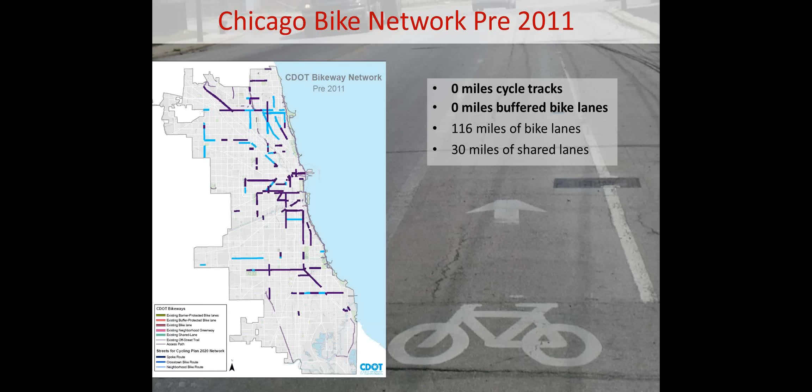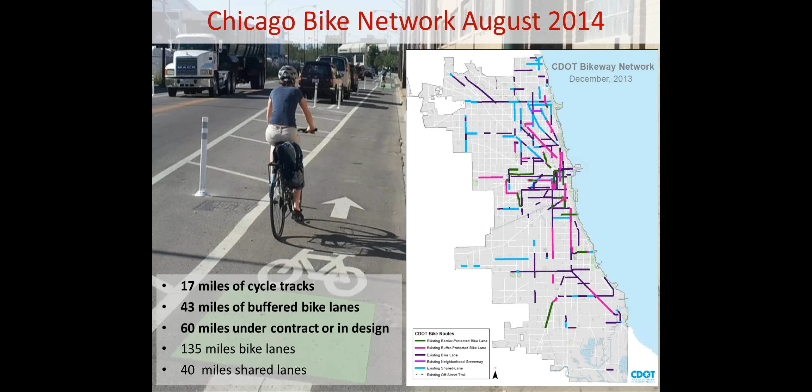So a little bit of background on the city of Chicago. Prior to 2011, we actually did not have a single mile of cycle track or buffered bike lane in the city. We had a pretty good network of bike lanes and shared lanes, but nothing providing that separation. As of this month, the network has really grown. We're up to 60 miles installed of cycle tracks or buffered bike lanes, and we actually have another 60 miles currently in design to be installed either later this year or early next year. So we're working through a lot of different projects.

From a technical perspective, this presentation draws from a few different manuals. The NACTO Urban Bikeway Design Guide is a great design guide - I recommend you take a look at it, it's free online. We'll also be drawing from the AASHTO materials, both the bike design guide and the green book, the geometric design. Our designs have actually been vetted locally in Chicago through those manuals, because those are critical for a lot of roadway designers, and also the Manual on Uniform Traffic Control Devices for all of our markings and signage.

First off, I want to walk through generally what I think is most important when designing intersections for bicyclists, and I think it's really bicycle position and conflicting turns. Then I'm going to walk you through 3 different types of designs we've installed in the city of Chicago and what went into those designs.

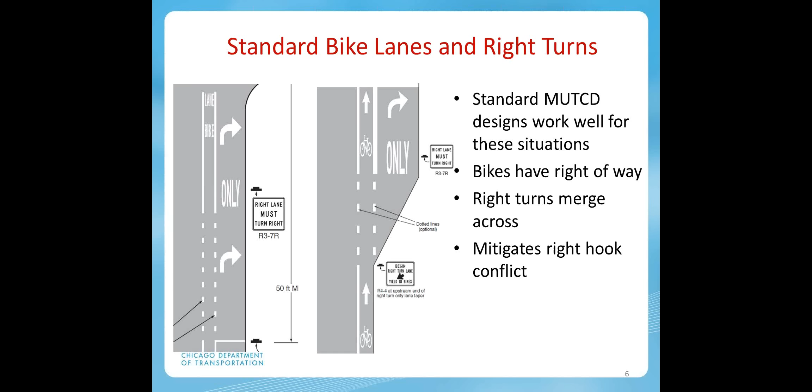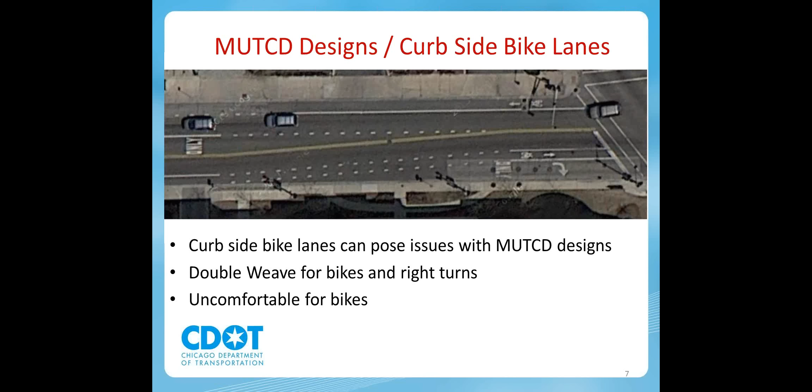Moving that conflict upstream and mitigating it is a good idea. Unfortunately, one of the things we've seen is with curbside bike lanes, which is very typical of protected bike lanes, this can cause issues. Trying to force this MUTCD concept on a curbside bike lane can actually create a situation where you end up with what I call a double weave, where bikes have to weave left and right turns have to weave right. That asks a lot of the users, and it's an uncomfortable situation for bikes - they have to look over their shoulder and merge and also look for right turns. I think all it's doing is moving the conflict up, not really addressing it.

So with that in mind, what I see as the intersection design goals for protected bike lanes: at all intersections we really need to understand our traffic speeds, our volumes, and our visibility. Those are very critical components to all intersections, and they hold true for protected bike lanes as well.

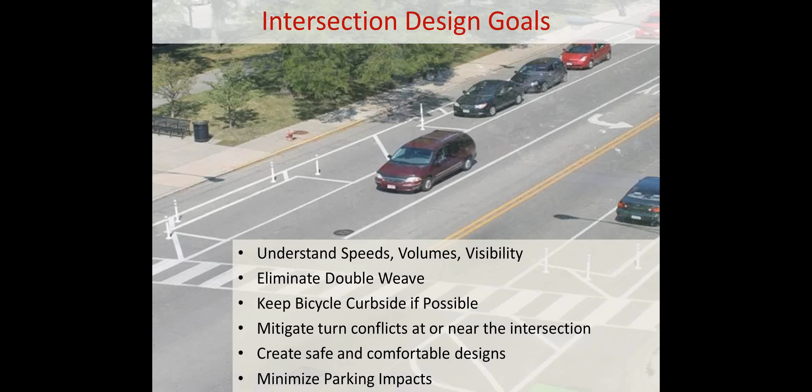I see that double weave concept as something important to think about when designing comfortable protected bicycle intersections. In addition, I think keeping the bike curbside or as close to curbside as possible makes it much more comfortable for a larger population of cyclists. Then, making sure to mitigate those turn conflicts at or near the intersection creates safe and comfortable designs. On-street parking is very common in a lot of cities, and when we do protected bike lanes, we're often shifting that parking out. It's hard to balance the needs for parking demand with bike design, so coming up with designs that minimize parking impacts is a goal as well.

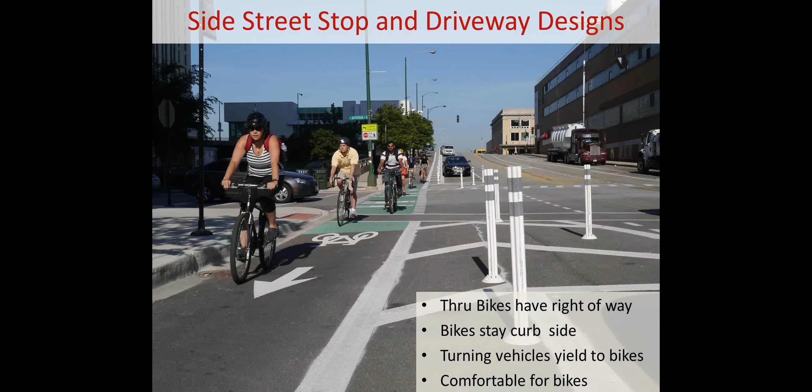The first type of intersection design is something I call the side street stop or driveway treatment. As you can see here, bikes are kept curbside, they have the right-of-way, and there is no traffic control stopping the bike. Turning vehicles are to yield to bikes, and I think this results in a very comfortable facility for bikes.

Looking at some of the geometrics of it, this design is really important when you have on-street parking or something physical in the roadway that would obstruct visibility. So it's important to pull that back a sufficient distance to open up those view angles. If you look at the AASHTO Green Book, there really isn't much guidance for right turn from major, which is the movement that controls for visibility.

So what we've done here is use some criteria on stopping sight distance based on our understanding of how drivers use driveways and intersections. We use 10-mile-per-hour stopping sight distance for driveways, based on the fact that most driveways are designed to accommodate a vehicle turning around 10 miles per hour. And we use 15-mile-per-hour stopping sight distance at intersections, because that does a good job mimicking - in the state of Illinois we have requirements where parking is pulled back 20 feet from the crosswalk.

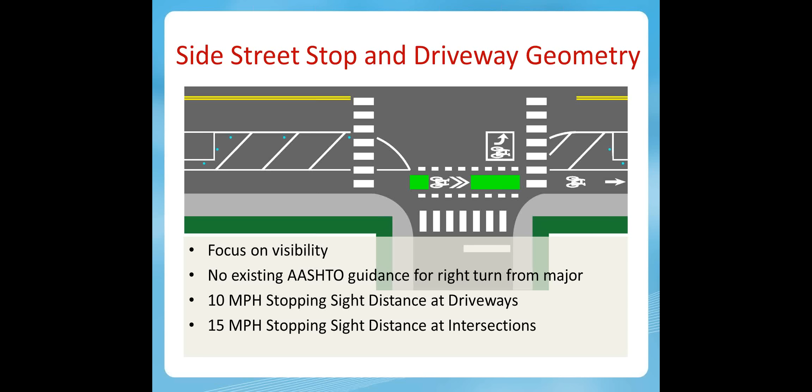That opens up a view angle of about 15-mile-per-hour stopping sight distance, so it mimics that same situation for bikes. You end up pulling the parking back about 30 to 60 feet, depending on that stopping sight distance number you utilize. This example shows an intersection, so the parking is pulled 60 feet back from that face of curb on the intersecting roadway, because really, as we're measuring this, it's where the vehicles turn.

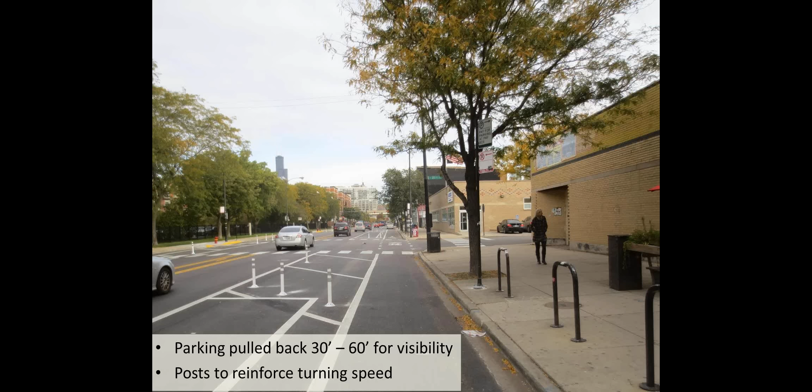As you can see here, we've used these flexible delineators, or posts, to help reinforce those speeds and make sure cars can't cut the corner too quick, really to reinforce that slower turning speed. Ideally in the future, this would be a situation where we could come back in and put some concrete here to really reinforce that turn speed.

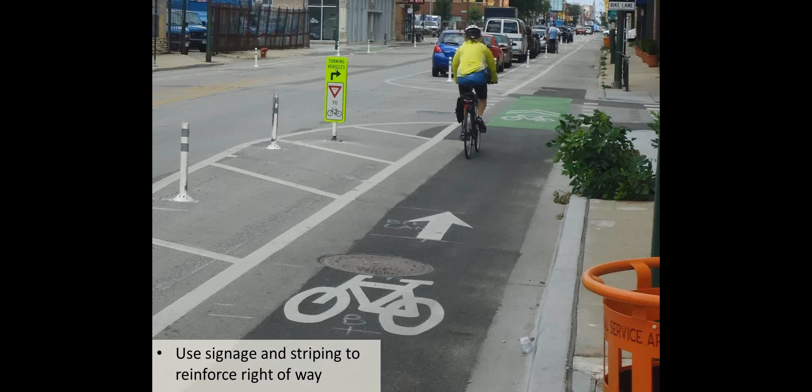In addition to that, you can also use some signage and striping to help reinforce that right-of-way. This is actually a driveway treatment. We've installed a sign helping to reinforce that turning vehicles are to yield to bikes, and also installed some intersection markings, some dashed white lines, and some green pavement markings, really to highlight the fact that that's a location where you'll see the conflict between bikes and turns.

The second type of intersection design I'd like to present is something we call a mixing zone. This is something you'll see now that we're getting to a point where we have signalized intersections or a lot heavier right turn volumes. Also, with the signal, bikes are expected to stop at a red light — they don't always have the right-of-way here. So the concept here is really to create a space that's slow in speed, shared space, encouraging single-file travel.

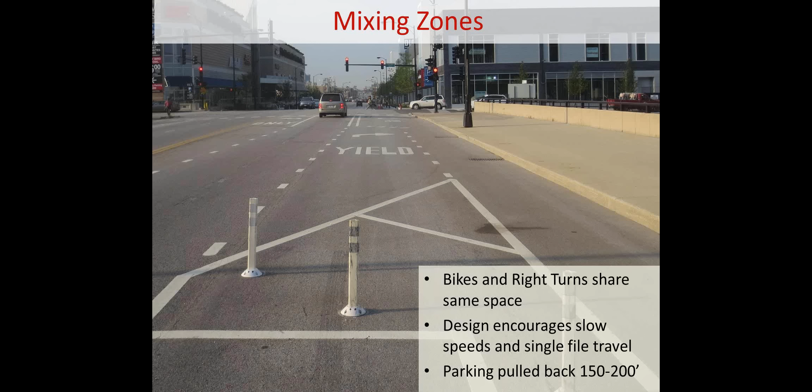You'll notice here the parking is pulled back a little bit further than the last concept I showed. Typically speaking, it results in about 150 to 200 feet of pulling back the parking from the stop bar. Some of the geometry of mixing zones: in the city of Chicago, our design is based on a 30-mile-per-hour vehicle speed. As speeds go up, that's something you really want to pay attention to, and mixing zones work well at slower speed environments. If you get to much higher speeds, mixing zones may be more difficult to implement.

But the AASHTO Green Book does call out that you can accommodate up to a 10-mile-per-hour deceleration in the through lane. So what we're doing is accounting for the fact that the driver, as they enter the right turn mixing zone, will start their deceleration before they hit the turn lane. The geometry is set up for a 1 to 7 taper, based on a 20-mile-per-hour speed. The storage near the stop bar varies depending on capacity analysis. Our minimum is 50 feet, based on 2 vehicles, out of the AASHTO guidance.

And the lane is striped at 14 feet to allow for shared space. So if a right turn and a bike get there at the same time, they have enough space to be side by side. But by the point of the intersection, we encourage more of a single file path to get the bikes where they're not shadowed on the right side of the right turn.

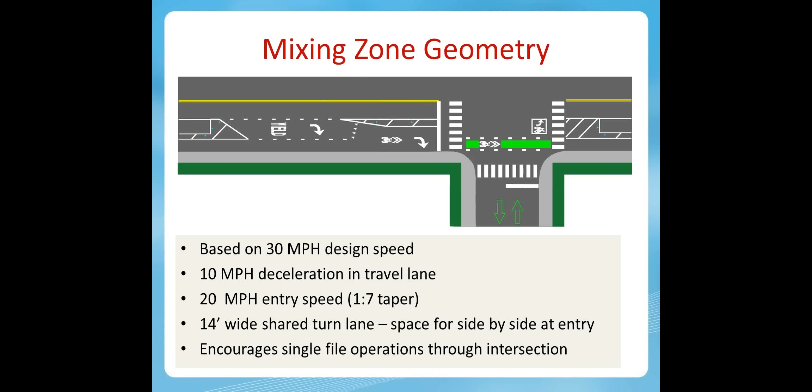So a little bit more on the mixing zones. A couple things we've done is actually installing posts in that striped-out area between the through lane and the right turn lane. Ideally, that would be concrete and more of a permanent situation. You really want to make sure people don't turn right out of the through lane, because that's where a bike would be kind of hidden behind the turn, and that also helps encourage the vehicle to slow as they approach the mixing zone.

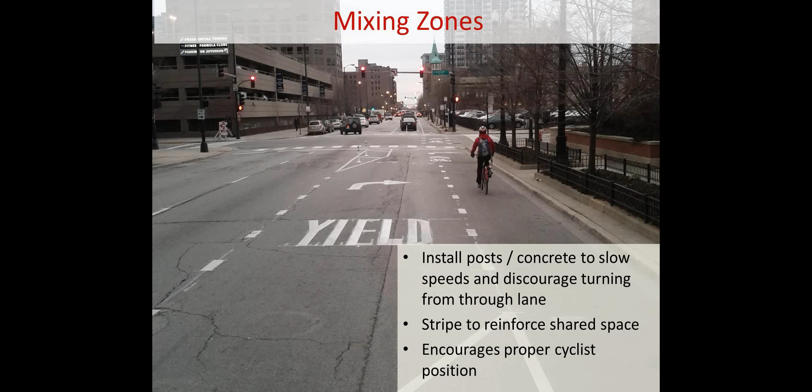As you see the markings, we've gone with a right turn and a yield legend, really reinforcing the fact that it's a shared space. We try to position the shared lane markings and the right turn markings in a single file path to really encourage the bicyclists to come out just a little bit and be single file with the right turns. In the intersection, you can see the intersection markings are kind of kinked a little bit to the left, further reinforcing the fact that we want the cyclists to come a little bit away from the curb and form a single file path.

We have also done mixing zones on streets without parking. It's not quite as critical here because visibility is not an issue.

But really what you're looking at here is with protected bike lanes without parking, what we see is that width does a pretty good job shadowing right turn lanes, because if you have, let's say, a 7-foot bike lane and a 3-foot buffer, that can actually turn into a 10-foot right turn lane at an intersection if you have a location with a high volume of right turns.

Another thing we've done, a nice subtle trick, is if you have enough space, you can position the cyclist a little further left in advance of the right turn lane, helping separate those decision points. So as the cyclist approaches, they shift slightly left, then have a straight path through the right turn lane, and the right turns mix across, separating those weaves.

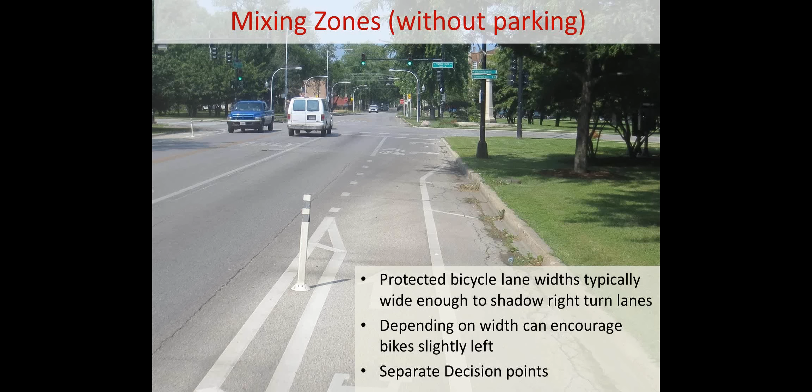If this was mirrored on the right-hand side, you'd have conflicting turns to the right. The general principles still hold true, that you're really trying to manage those conflicting turns.

One thing to note: if you're looking at a two-way cycle track, I highly recommend limiting those to streets that are one-way in nature. Doing a two-way cycle track on a two-way street creates a lot of conflict points at intersections. It can be done, but it gets a lot more complicated with traffic phasing and signalization.

But if you do this right, it can actually result in a really comfortable facility for bikes where they are completely separated from conflicts from turns.

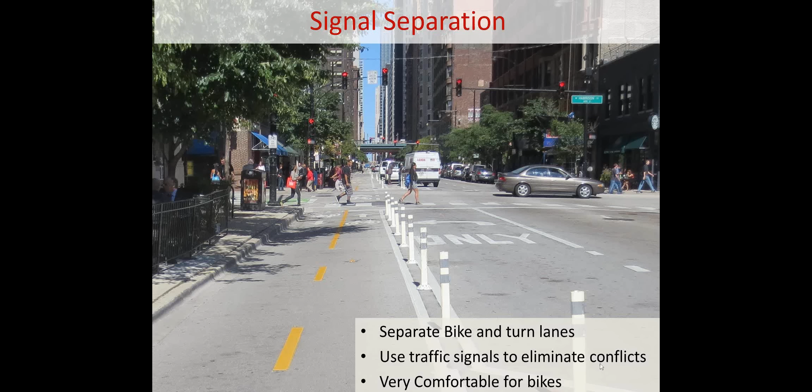One of the critical components of this project was installing dedicated bicycle signals, and Nick's going to touch on this a little later. These are brand new elements you can utilize in your design. They just got interim approval less than a year ago.

This is based on the fact there have been a lot of good studies throughout the United States, in localities including Chicago and other cities, showing that these have really done a good job eliminating conflicts between turns and bikes, allowing for increased safety and also increasing cyclist compliance.

We did some before and after analysis looking at cyclist compliance with bike signals, and we noticed that compliance went up from 30 to 90%, with not much education or enforcement, just with the bicycle signals.

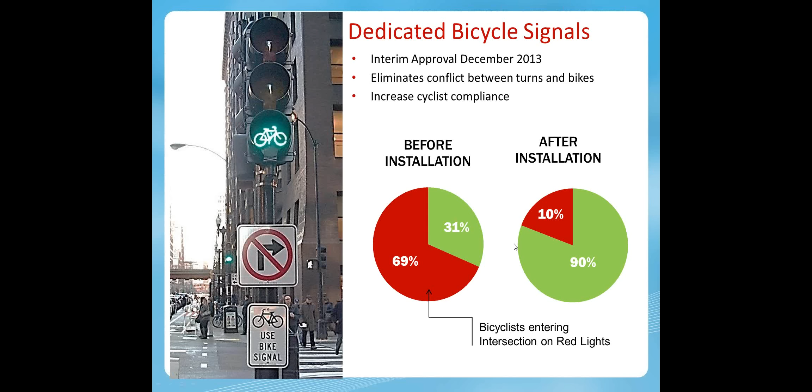Some of the technical elements - this slide is directly out of the NACTO guidance. They do a great job outlining all the critical components for designing bicycle signals and other components.

First and foremost, it's important to have 2 signal faces per movement, and one of those needs to be far side. So if you're installing bike signals, at least one needs to be far side. You can put both far side, but if you don't have the room, one can be near side. I recommend using 12-inch lenses for far side.

There is some guidance in the MUTCD that allows you to go down to 8 inches. I don't recommend it - I think if you have the budget, using a larger lens is really a good idea.

On the near side, you see the signal is a little lower and smaller. That's a trick some places have used, where they use 4-inch lenses, and it is allowed in the MUTCD as an option. I also recommend going to protected-only vehicle turns.

This does a really good job eliminating the conflict between bikes and turns, and it can also help if you have a crash pattern between turns and pedestrians, maybe in a downtown environment with a lot of pedestrians - it can help increase safety with that.

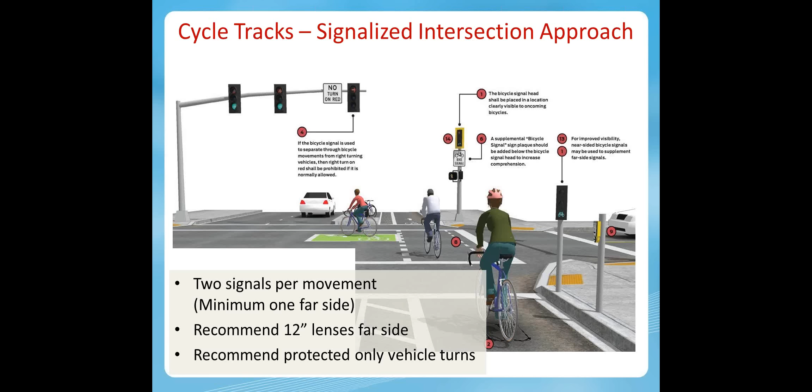What we've seen in the Loop is actually slightly better capacity, because there are so many pedestrians crossing the street that hard turns get held up. So providing that protected phase actually helps a little with capacity.

As mentioned in the other solutions, if you have on-street parking as part of your protection, there will be impacts to parking when installing left or right turn lanes and dedicated phasing. In the loop, parking is typically set back about 30 feet from stop bars by city ordinance. To put in these left turn lanes, we need to pull back parking about 100 to 150 feet. We got away with that by using a pretty short taper and storage, knowing that in the peak period traffic volumes are heavy and people are going slower, so they're able to merge over in a shorter distance. But in an uncongested time, we still have that full taper distance from the entry to the stop bar to allow someone to fully merge over.

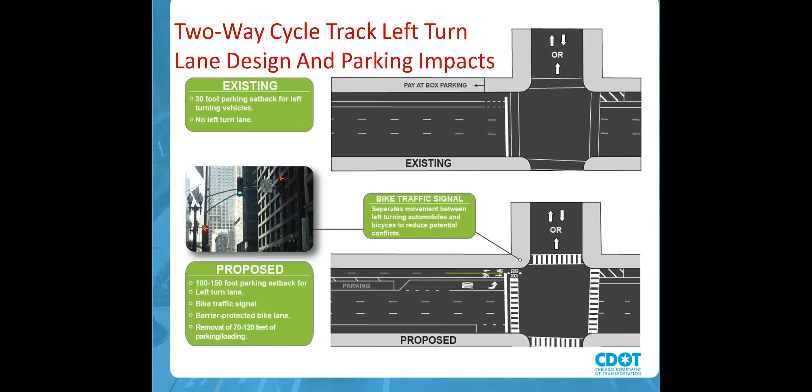Finally, I wanted to walk you through a typical phasing used when installing these dedicated bike lanes with bike signals up to the intersection. We've recommended going to lagging turns, partially to allow pedestrians to go first and have turns go last, mitigating those conflicts. It also works well with bikes.

This is looking north on Dearborn at the intersection of Wacker. Wacker is a two-way street, and Dearborn is one-way northbound. So the first phase is northbound throughs. Northbound rights get a green ball. Northbound lefts are held on a red arrow. Northbound and southbound bikes also get a green ball. You'll also note that pedestrians on the east and west leg of the intersection go.

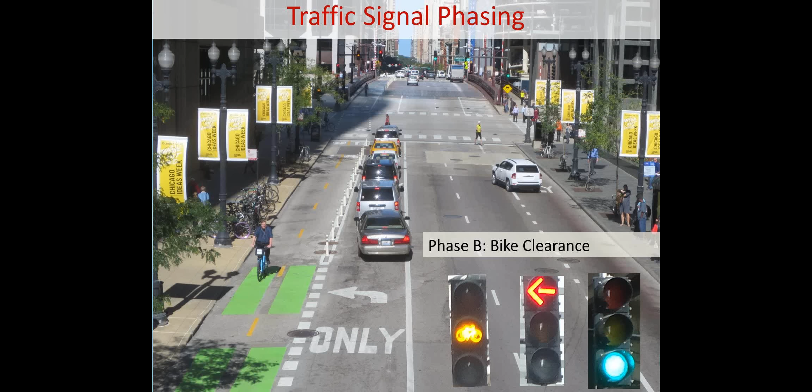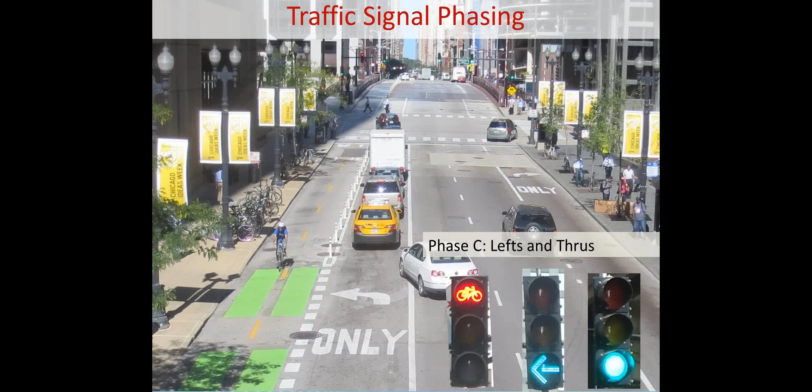The second phase is a bicycle clearance, so northbound throughs and rights still have their green ball. The bikes are cleared with a yellow and red phase, and pedestrians on the left leg of this intersection are also cleared. That's followed by a lagging turn phase, where northbound throughs, northbound rights, and northbound lefts all have green indications, and pedestrians on the right leg of the intersection still get to cross.

Finally, we wrap up with a vehicle clearance, providing the yellow indication in advance of the red indication for the vehicles before the cross street gets the green light.

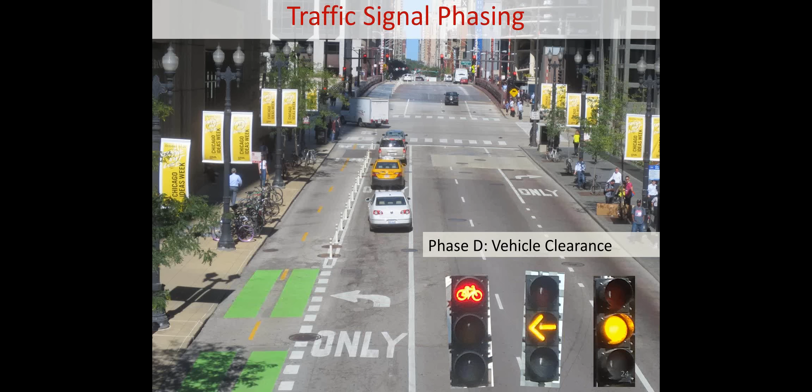I know there's a lot of questions. I've tried to go through some of them, or incorporate some into the presentation, but I think we'll have time afterwards to answer some. And with that, I'll turn it back to Kit. Well, thank you so much, Nate, that was a great presentation.

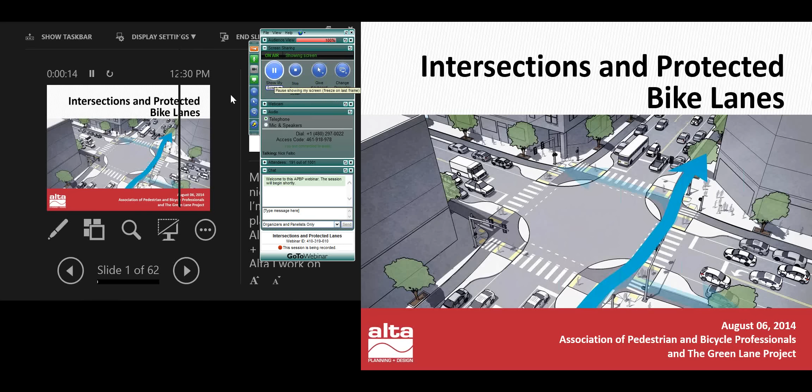Monitor 1 or 2? Two. It's kind of like seeing both the control room and the slides at the same time. There we go, that's good. Is this changed? No, now it's just the presentation.

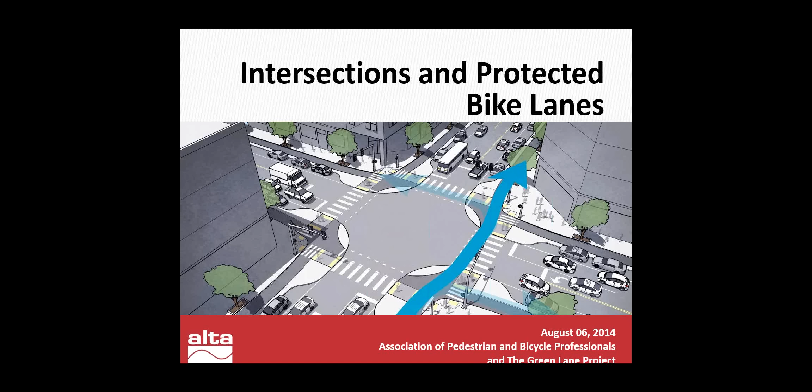In the presentation today, I'm going to make a brief case for the need for the new treatment, break down the elements of the design, and explore the ways that U.S. designers are already putting these elements into practice. Then I'm going to finish with a discussion of some of the potential challenges and issues I've heard about so far related to the design.

Nathan's presentation, I think, was a fantastic overview of the current practices at protected bike lane intersections. The work done in Chicago and other leading U.S. bike cities is spelled out in the NACTO Urban Bikeway Design Guide, and it offers a variety of different treatments to use in response to different context and intersection configurations.

The general approach for designing bikeways at intersections can be classified into four main strategies: increasing awareness of potential conflicts through colored pavement, markings, and signs; increasing the conspicuity of bicyclists by positioning them in highly visible locations; isolating conflicts so they can be negotiated separately from the intersection itself; and clearly assigning priority to users through signals, markings, and geometry.

The current suite of protected bike lane intersection designs do this, and they do it well. The experience so far shows us these are safe facilities. But I want to add one more strategy that I think we should employ in our designs: maintaining bikeway comfort, so that the trip through the intersection is as comfortable as the trip to the intersection. There is some indication that our current designs don't go far enough in this area.

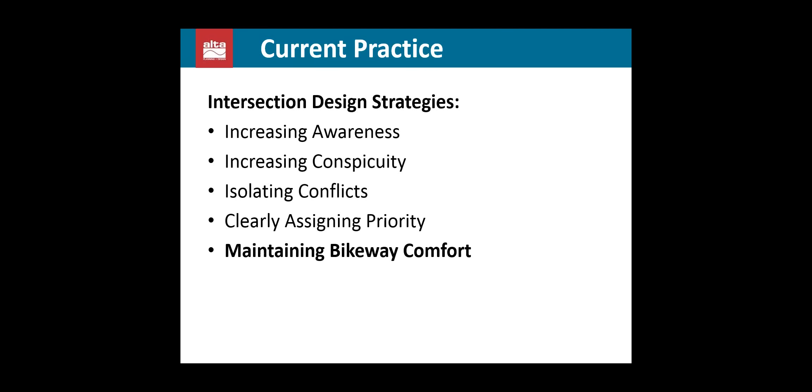A recent research report completed by OTREC at Portland State University, working with the Green Lane Project, conducted a large-scale survey and analysis of the various intersection treatments employed on U.S. protected bike lanes. While I'm still diving into the results and implications of this study, one data point in particular caught my eye. The survey asked bikeway users to agree or disagree with the statement: 'I generally feel safe when cycling through the intersection.'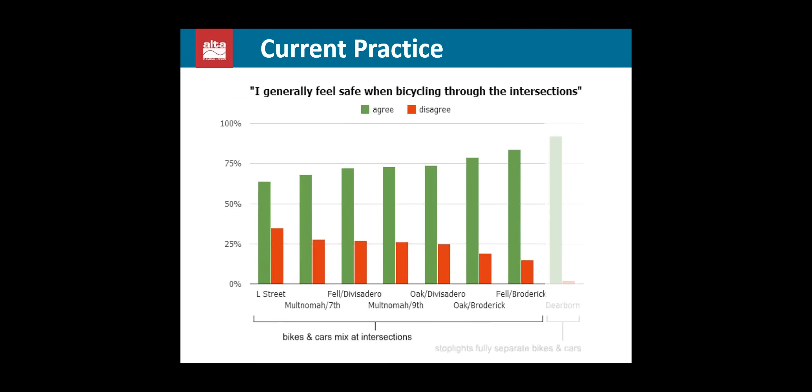For the intersection designs that involved mixing or weaving between bikes and cars, the agreement was about 60 to 80%. But for the intersection designs that maintained physical separation and used signals to control conflicts, the respondents had 92% agreement. So to maximize user comfort, and by extension I think ridership, I think we need to do better than 70% on our intersection designs. And maybe we need a new tool.

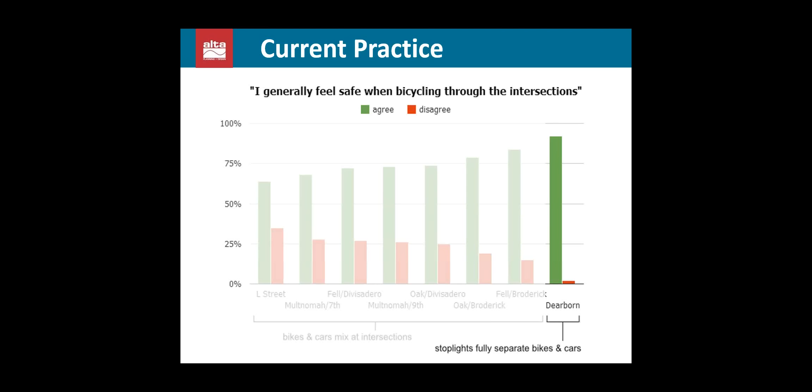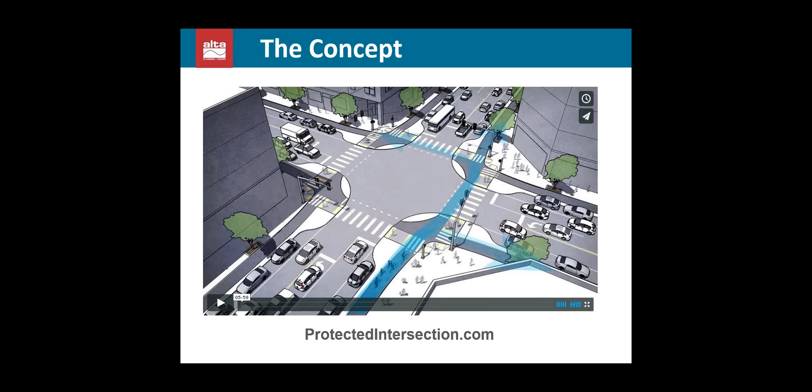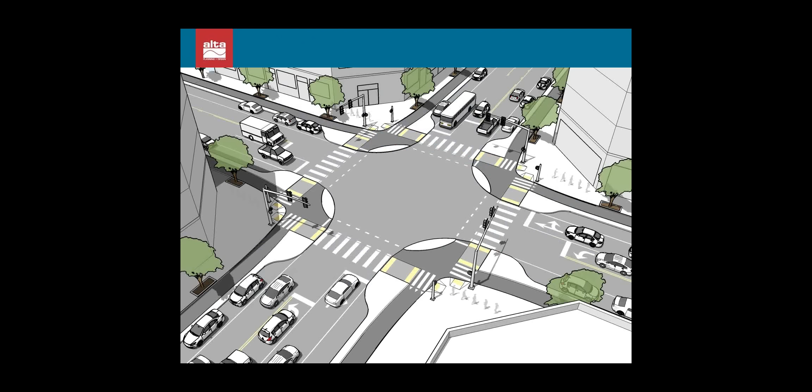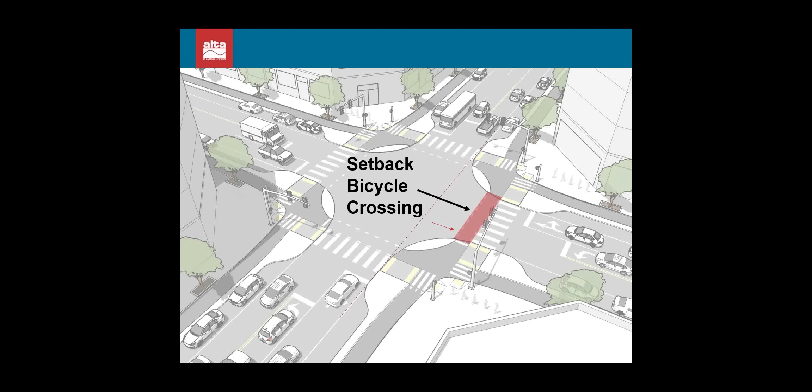There are four main elements that all work together to create a safe, comfortable experience for bicyclists in this design: a corner refuge island to bring a barrier into the intersection and slow driver turning speeds, a forward stop bar for bicyclists to put people biking in a visible location, a setback bicycle crossing to give users time to yield and react, and bicycle-friendly signal phasing to manage or prevent conflict.

The corner refuge island is the element that ties everything together. This island brings the protective barrier from the bike lane far into the intersection. It physically separates bicyclists as they make right turns and provides a secure refuge for those waiting at a red signal, protected from moving cars.

Paired with the corner refuge island is a forward stop bar for bicyclists. While people driving must stop back there behind the crosswalk, people on bikes may yield to pedestrians and stop ahead at the bicycle waiting area. Bicyclists turning left also use this space to wait when making a left turn, very similar to a conventional two-stage turn box.

The forward stop location makes bicyclists incredibly visible to drivers when they're waiting at a red light. And the physical distance ahead of cars gives bicyclists an effective head start when the light turns green. And the distance of the road that bicyclists need to cross is greatly reduced.

It's worth noting that the stop bar separation is significant. A bike box, which also provides a different stop bar for bicyclists than for cars, provides about 14 feet of difference ahead of the cars. In this design, it's closer to 35 feet ahead.

In the protected intersection design, the bike lane bends away from the intersection, creating a setback bicycle and pedestrian crossing. In contrast to a conventional bike lane that runs next to moving cars, the setback crossing provides the space and time for everyone to react to potential conflicts.

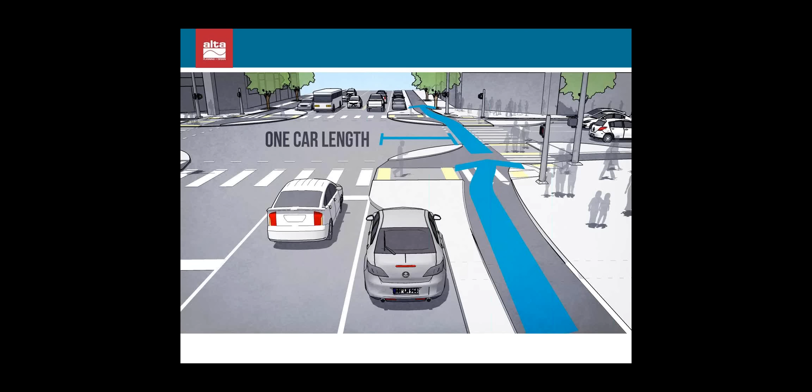The critical dimension to provide is one car length of space between the traffic lane and the bicycle crossing, around 6 meters. This space is often already present in the parking and buffer space of the protected bike lane.

With this design, drivers turn 90 degrees to face the bike lane before they cross, making people on bikes highly visible and out of the driver's blind spot. It's really critical here to encourage a really slow turning speed in these corners, so you want a really tight, small, effective corner radius. The ideal turning speed would be close to bicycle speeds, 5 to 10 miles an hour.

Finally, just as important as the physical design of the intersection is the use of signals to control how and when different people can proceed. It may be possible to operate this intersection with conventional circular and arrow traffic signals, but where possible, I think it's worth enhancing the experience with bicyclist-specific signals and bicycle-friendly signal phasing.

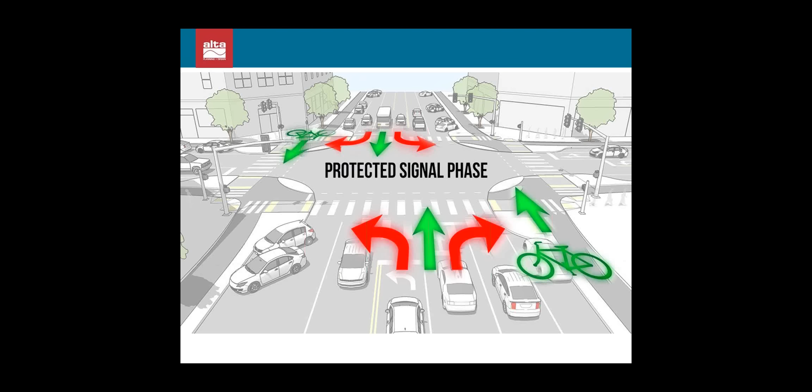At its most secure, a protected signal phase for bicyclists will use a red signal to prevent any conflicting car turning movements. There is no risk of right or left hooks from cars when they are prohibited from turning while bicyclists are traveling through. This requires exclusive turn lanes for all desired movements so that they can be controlled independently.

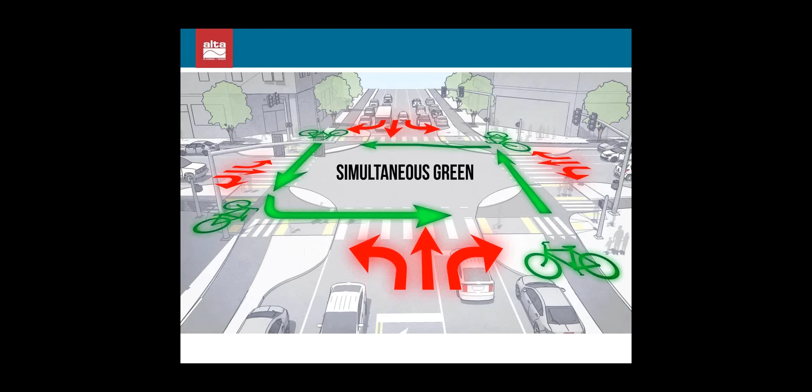A variation of the protected signal phase is to give all car movements a red signal and all bicyclist movements a green. The simultaneous green phase gives full rein of the intersection to bicyclists, allowing through movements in all directions at once, left turns in one stage, and even full U-turns through the intersection. I'm convinced that even at high volumes, bicyclists are good at negotiating shared space and will have no trouble staying out of each other's way.

When it's not possible to prohibit conflicting movements entirely, an alternate approach is to provide a leading bicycle interval. This is a head start green light for bikes of anywhere from 2 to 5 seconds, providing a little bit of extra room to get rolling and enter the intersection, and maybe even clear it completely before people driving start to move.

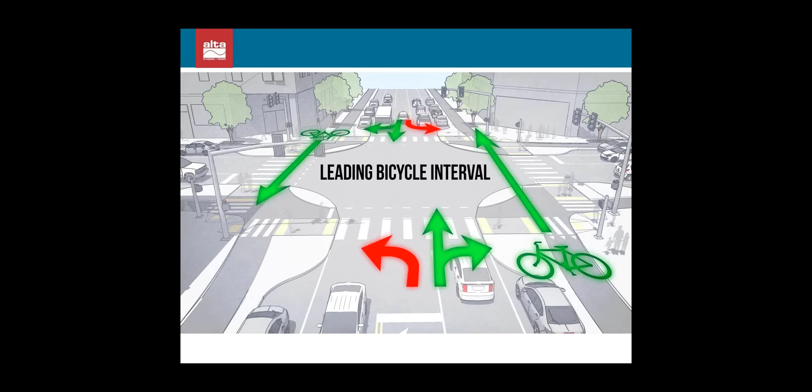Because we've got this forward stop bar configuration built into the geometry, a leading bicycle interval may not be as useful than it would otherwise be at a conventional intersection design. You might be able to get a similar result out of just a regular circular green indication.

So when used together, these elements create a comfortable, safe experience for bicyclists crossing or turning within the protected bike lanes. I think these elements have the potential to fill a gap in our bikeway toolbox, allowing us to create crossings that are both safe and low stress.

Now, I wanted to offer a brief note about the history of the design. As I was doing some digging into existing guidance related to it, it turns out that there have been at least some American bikeway engineers that have known about the design for over 40 years. The 1972 Institute of Transportation and Traffic Engineering at UCLA released bikeway planning criteria and guidelines on behalf of the state of California, and they identified this intersection treatment as something they had seen in Germany.

That same year, there's a more localized report prepared for the city of Davis that also identified this design. The Davis study reflected on the design a little more, noting that because bicyclists had to deflect from a straight path—very unconventional for American bicyclists—experimentation with these designs was necessary to determine their safety and effectiveness under North American traffic conditions. But apparently the experimentation never happened, and the idea was forgotten.

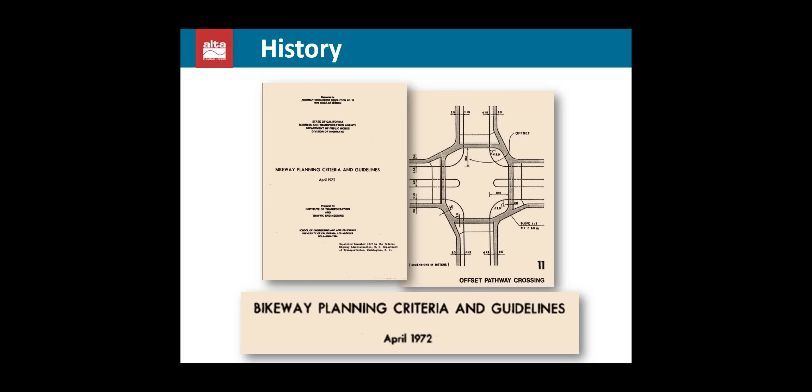Subsequent international scans since the mid-90s have visited the Netherlands, and in their reports back, they hadn't fully conceptualized this protected intersection design. They've only called out certain elements of it, but never really pulled it all together in one design.

So the big question everyone has is, can we build this in the US? And in some ways, we already have. All of the elements themselves are already in use today in some form. Bike signals have become more common tools for managing bikeway conflicts. Forward stop bars are a useful tool in the bicycle boulevard crossing toolbox for increasing conspicuity and shortening crossing distances for bicyclists.

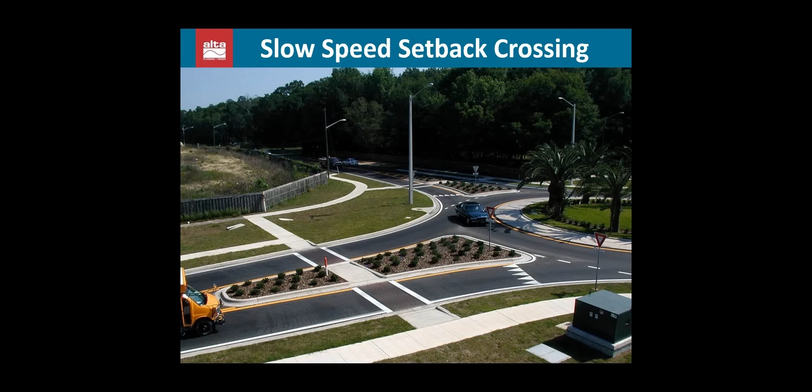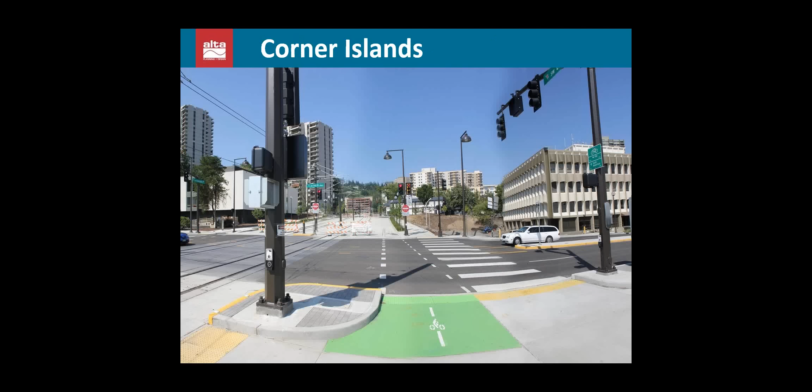Slow speed setback crossings are the standard design for crosswalks at modern roundabouts. Pedestrian refuge islands are used in protected bike lane buffer zones to protect users and shorten crossing distances. And corner refuge islands align, channelize, and protect bicyclists at crossings. At this point, I think all it's going to take is for a bold jurisdiction to pull all the pieces together.

So I want to talk about the potential design and implementation challenges that have been brought to my attention. The list is longer than this, but these are some of the big ones, and I wanted to briefly talk about them and discuss some potential solutions to try to move this design forward.

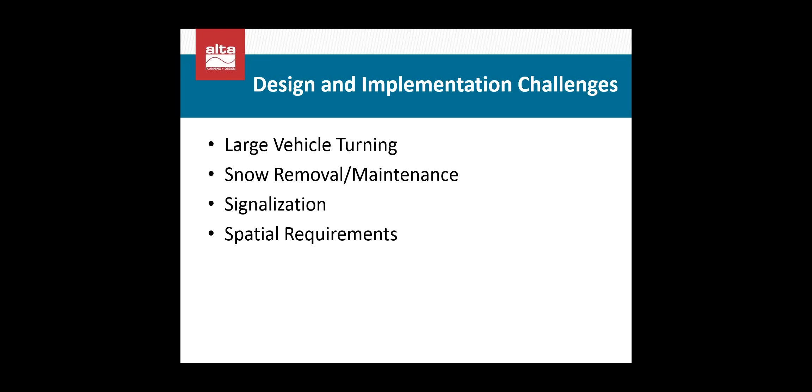So how do we resolve this? First, it might not actually be an issue after all. The requirement for a small turning radius is there for when you have permitted conflicts, permitted turns, and you're trying to encourage slow speed turns. If you actually have signalization and can manage your conflict through signals, then the turning radius doesn't really matter. That island is there to provide comfort for users, not as much to manage speed.

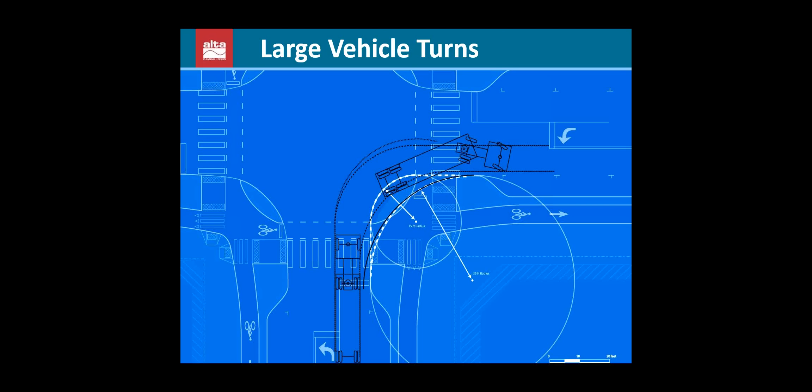Second, I think it's important to remember that truck accommodation is a policy decision. Policies can determine which routes are truck routes and which are not. Policies can determine what the standard design vehicle is for a route. And policies can bring flexibility to the way you design and accommodate large vehicles.

This is a pretty typical intersection design designed for a large vehicle. You can see it turns from its own lane into its receiving lane on the cross street and encroaches a little bit on the bike lane. And there's a nice wide 40-foot corner radius to make the turn easy.

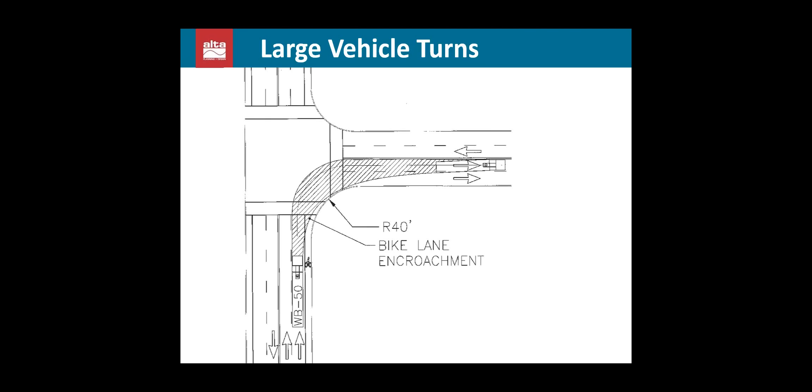But if this was a pedestrian-oriented area or a bike-oriented area where you might want to use the protected intersection design, that 40-foot corner radius isn't going to cut it. It's much too large, and it results in turning speeds that are too high for comfortable walking and biking. In those areas, perhaps a 15-foot corner radius is more appropriate.

It's absolutely possible. In cities with sophisticated truck policies, they have multiple levels of large vehicle accommodation. It's possible to accommodate that same large truck through that same intersection, even with a 15-foot corner radius. Now, the truck operator has to do some amazing physical gymnastics to make this work. They have to use the adjacent lane, and they have to occupy the full intersection in the cross street, but it's possible, and that's the important thing.

This is an important design detail: if your large vehicles are an infrequent user and bicyclists and pedestrians are prioritized, then policies that actually allow this type of accommodation are a good practice. But if policies fail you, I think there's a geometric solution.

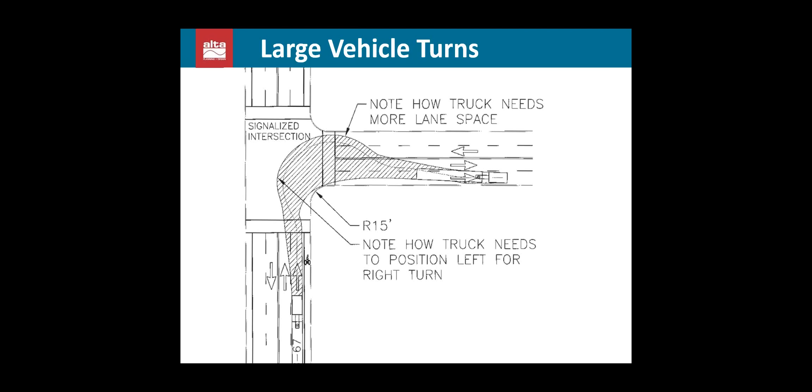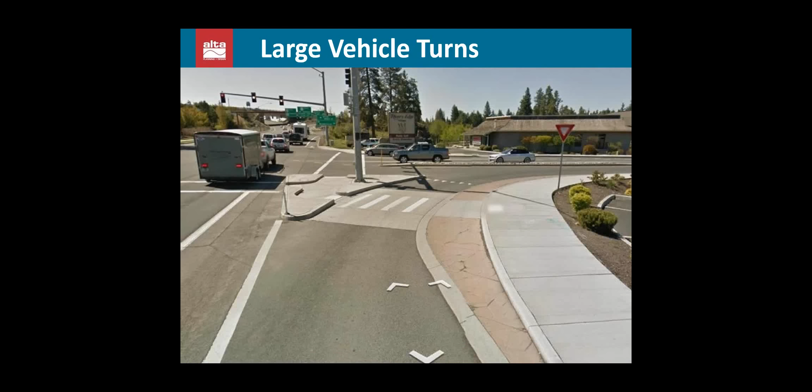Truck aprons allow you to design two separate turn radii, one for passenger cars and one for trucks. This is a common design feature in roundabouts on the central island, where trucks can mount and traverse the apron as necessary to make the turn. The passenger cars stay off the apron and remain in the circular roadway. The same design has been applied in channelized turn lanes and can be used at corners to effectively create two different curb radii.

Snow removal and maintenance. This is the next question I get from engineers: how do we keep it clean? Most commonly I get this from people who are in cities that don't have protected bike lanes themselves. And in general, if you have a protected bike lane and you have a way to keep that clear, then you should be able to clean out these protected intersection designs, no problem.

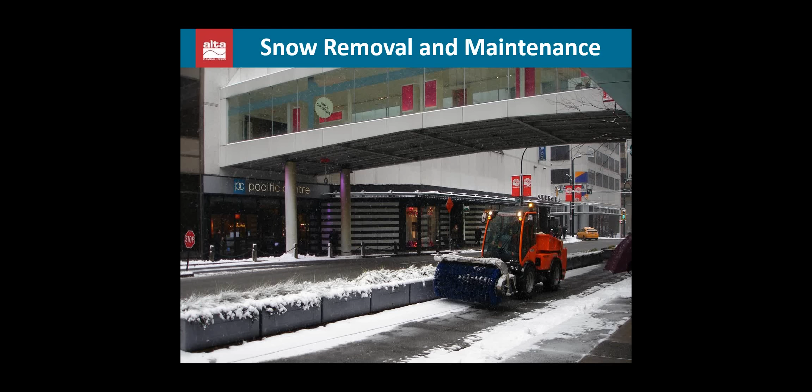It may be possible in this case to get around some of these restrictions by using the bikes-use-PED-signal sign. Some of the designs I've seen have explored this idea. I'm not sure if it's going to be the ultimate final solution for this. We really would rather have some more flexibility in the way bike signal faces can be used.

And then the last common issue has to do with spatial requirements. People look at the design and say, where do I have room in my city to make this work? It looks pretty big, and I encourage people not to look at this drawing and call it a standard drawing. The important details are really on the road side.

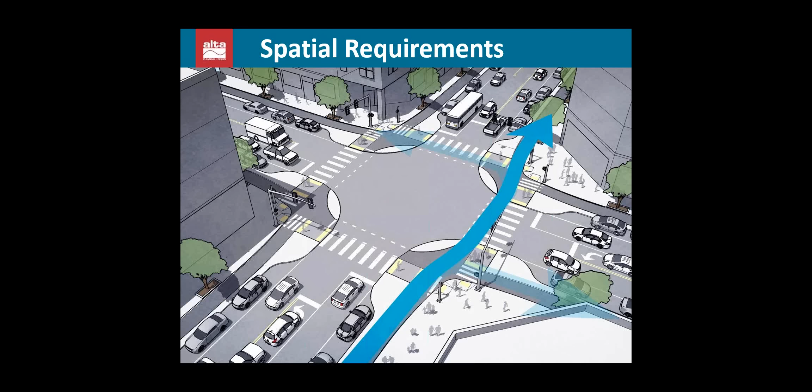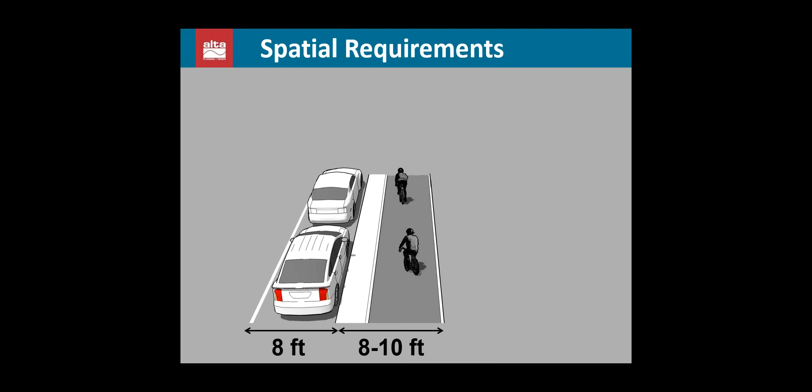My rule of thumb for whether or not this will work on a certain street is this: you need a parking lane, you need some space. A standard parking lane is about 8 feet. You need a standard protected bike lane, anywhere from 8 to 10 feet - bigger is always better - and you need an ample sidewalk. When you have all those dimensions together, that is enough room to bend your cycle track, your protected bike lane, away from the intersection to provide that one car length of space.

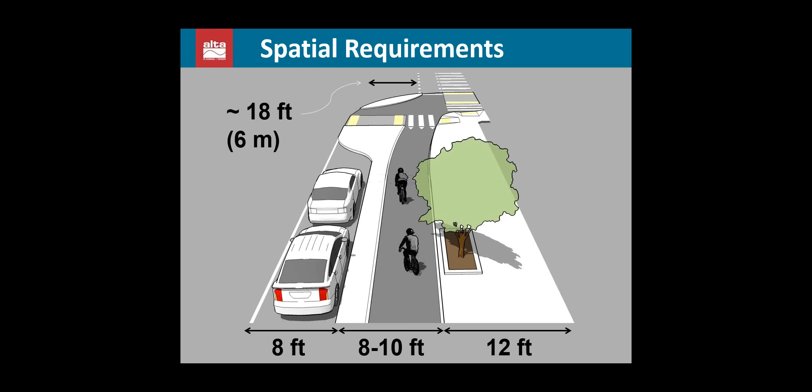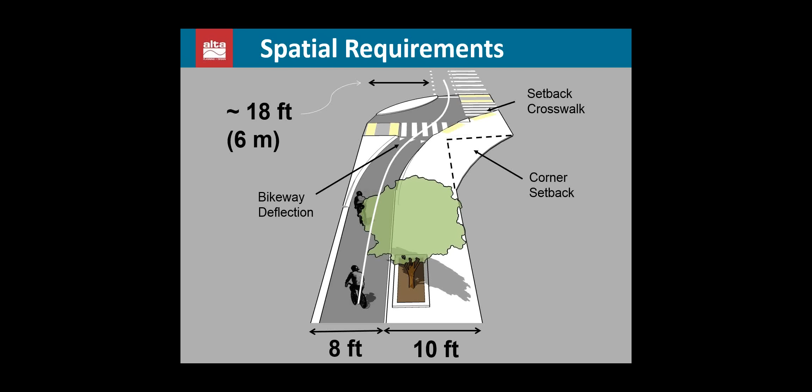Now, even in more constrained conditions, you might be able to take advantage of the design, but you'd have to be willing to set back your pedestrian crosswalk even further. You'd have to be able to occupy some of the right-of-way and the property on the corner, and you'd have to be willing to accept a high degree of deflection from the straight path of a bicyclist in order to fit it all in there.

Before I finish, I wanted to show a couple quick sneak peeks of U.S. concepts where cities have tried to take this seriously and started making proposals.

This is a concept in Lincoln, Nebraska. Some Alta engineers have been working on this one for a while, and earlier designs involved permitted conflicts. Although that has been revised since the interim approval, we are now doing fully protected signal phases. But these corner islands are very similar to the corner refuge islands in the design—deep enough to store an entire car, using some of those principles.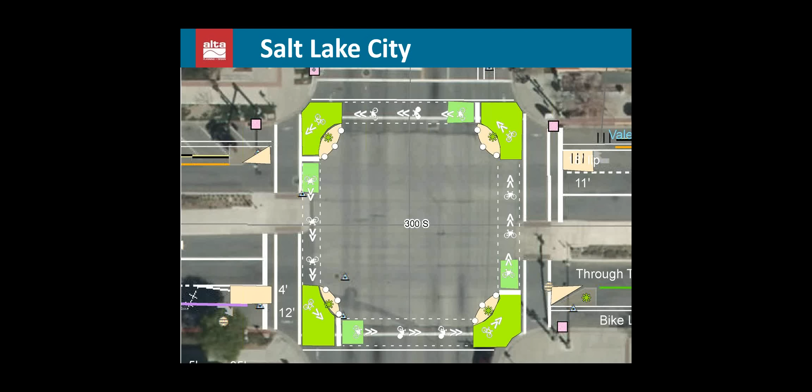So while these designs are not implemented today, the interest and exploration makes me hopeful that we'll soon have on-the-ground examples to look to here in the United States. Thank you for your time. I look forward to questions and discussion.

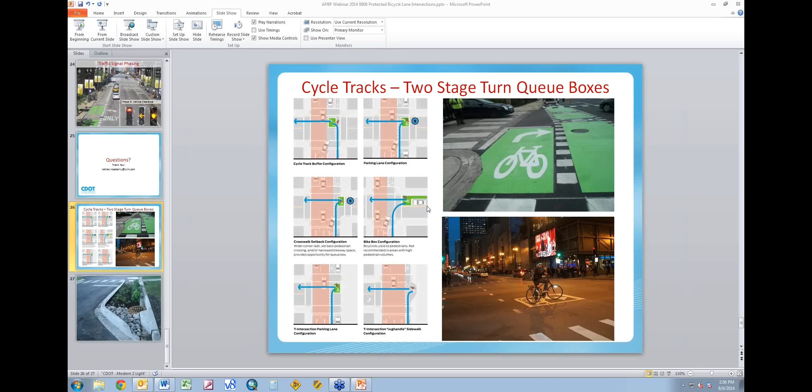Okay, you're on. Great. I didn't walk through this in the presentation, but this is a slide we'll typically present to explain this concept of two-stage turn boxes. For those who aren't familiar, really what it's allowing someone to do is, as bicycles approach the intersection, they have two ways they can turn. They can either merge in with traffic and act as a vehicle, or they can turn more like a pedestrian and do a box turn or a two-stage turn where they cross one direction, wait for the green of the intersecting street, and then go.

You can mark that area. What you see here on the left-hand side are different configurations out of the NACTO guide based on what your road geometry is. On the right, a couple examples in the city of Chicago, one where we have it on the sidewalk side of the bike lane, and another one where it's on the street side, shadowed by parking.

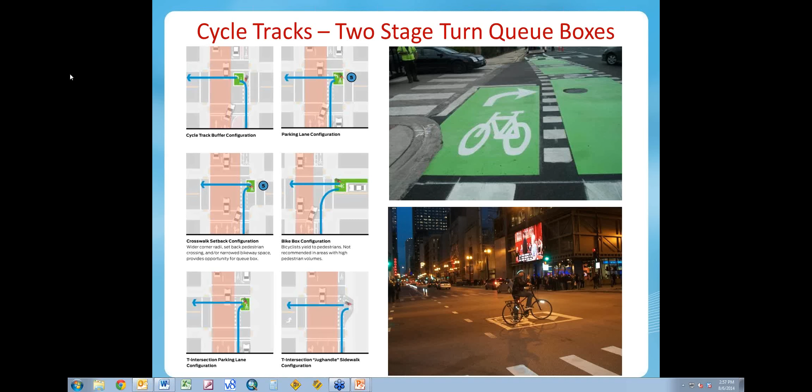And where is that location, did you say? This is on Berteau, our first neighborhood greenway, installed on the north side of the city. In Chicago? Yep, okay, great. Yeah, we had seen Portland do a lot with that kind of treatment as well.

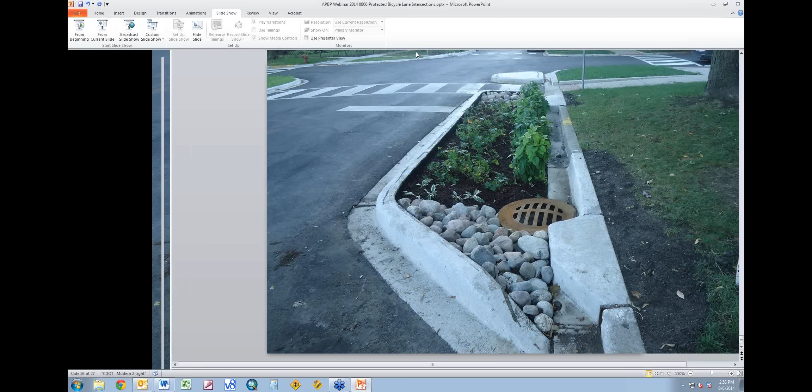Okay, great. Did you have other images that you wanted to show, Nate? No, not at this time. Okay, great. If there's any other great questions... well, it's easy to switch back and forth, and we only have a couple of minutes left, but here's a question, and I'd love to know the answer to that.

How effective are forward stop bars as an intersection treatment to reduce right hooks? Any conditions for when they shouldn't be used?

Well, this is Nick here. Forward stop bars currently in the U.S. are used often as a bike boulevard crossing treatment, most often at stop signs, so the right hook risk isn't quite the same, and our current experience isn't going to answer that question. But it does make you very visible, and as a bicyclist you are occupying the spot where a right-turning motor vehicle would turn. So they're going to see you, and hopefully they won't turn into you while you're in that position.

Thank you for that answer. Our previous webinar on protected lanes dealt specifically with accessibility, but we have a question dealing with accessibility here and intersections. Would you care to address how accessibility and protected lanes work at intersections? What are the ADA considerations with protected intersections? And has any outreach been done to understand the needs and concerns of people with accessibility needs?